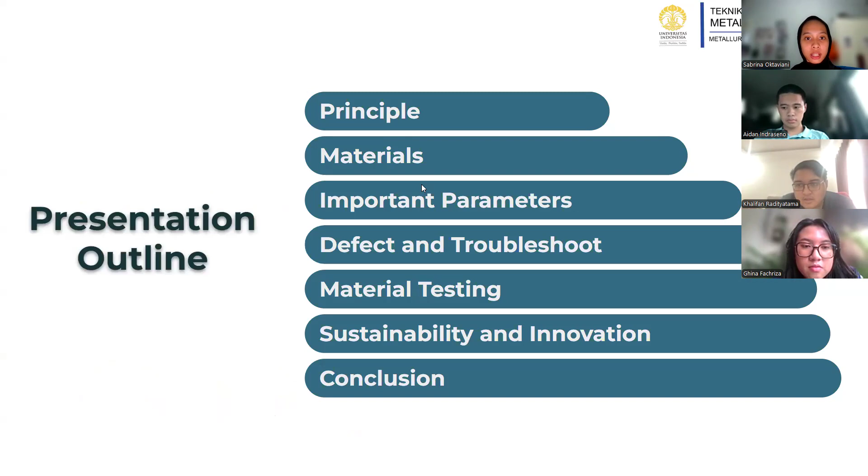Here's our presentation outline, starting from the principle and ending with the conclusion.

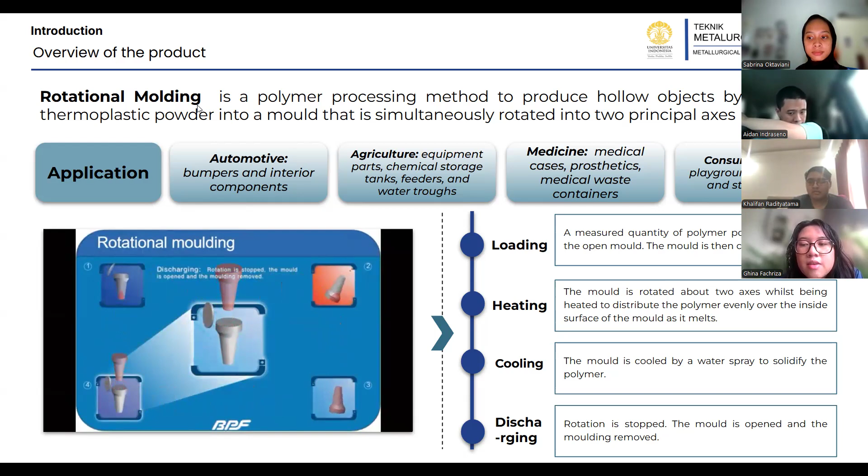Here I'm going to explain the rotational molding principle itself. Rotational molding, commonly referred to as rotomolding, is a polymer processing method designed to manufacture hollow plastic objects. The process begins by placing a measured quantity of thermoplastic polymer powder into a mold. The mold is then sealed tightly to prevent spillage or contamination during subsequent stages.

Here are the key stages of the rotational molding process. The first stage is the loading phase, where the polymer powder is loaded into the mold. The amount of material is carefully measured based on the desired thickness and size of the final product. Once loaded, the mold is securely closed.

In the heating phase, the mold is rotated simultaneously along two principal axes while being subjected to heat. This dual axis rotation ensures even distribution of the molten polymer along the mold's inner surfaces. As the temperature increases, the polymer powder melts and adheres to the mold, forming a uniform layer.

After sufficient heating, the mold enters a cooling stage, during which water or air is used to reduce the temperature. This cooling process solidifies the polymer, ensuring the object maintains its shape and structural integrity once removed from the mold.

The last phase is the discharging phase, where once the polymer has fully solidified, the rotation stops, the mold is opened, and the whole product is carefully removed. The final product typically requires minimal finishing, as the process inherently produces smooth and uniform surfaces.

Rotational molding is a highly versatile manufacturing process with applications across various industries. In the automotive sector, it is commonly used to produce durable components such as bumpers and interior parts.

In agriculture, it is employed to manufacture essential items like chemical storage tanks, feeders, and water troughs, which require robust and weather-resistant properties. The medical field also benefits from rotational molding for creating prosthetics, medical equipment cases, and waste containers, ensuring hygiene and functionality.

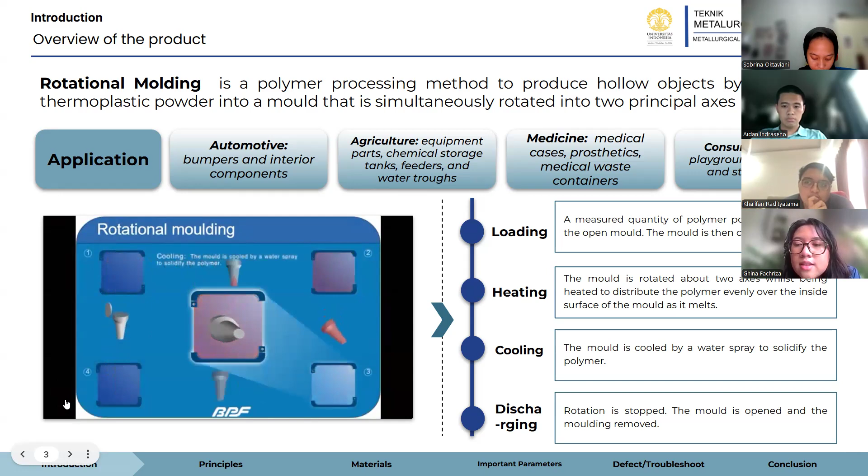Additionally, in the realm of consumer goods, the process is used to produce items such as playground equipment and storage bins, offering lightweight yet sturdy solutions for everyday use. This adaptability makes rotational molding a vital method for crafting diverse, high-quality products.

This process is particularly advantageous for creating complex shapes, uniform wall thickness, and durable products at a relatively low production cost, making it ideal for both small and large-scale manufacturing.

Now we're going to the material selection for rotational molding. First, we have the common polymers used. Polyethylene is the most commonly used polymer for rotational molding. Its thermoplastic properties make it easy to heat and reshape using this process. Applications include cargo tanks and toys.

Another common polymer is polypropylene, which has a higher heat distortion temperature and excellent chemical properties. Resistant to abrasion, it is very suitable for food packaging applications.

We also have nylon, which is known for its high impact strength and high tensile strength. Its physical properties are maintained at high temperatures, and it is also resistant to many chemicals. Applications for nylon include fuel cells and air ducts.

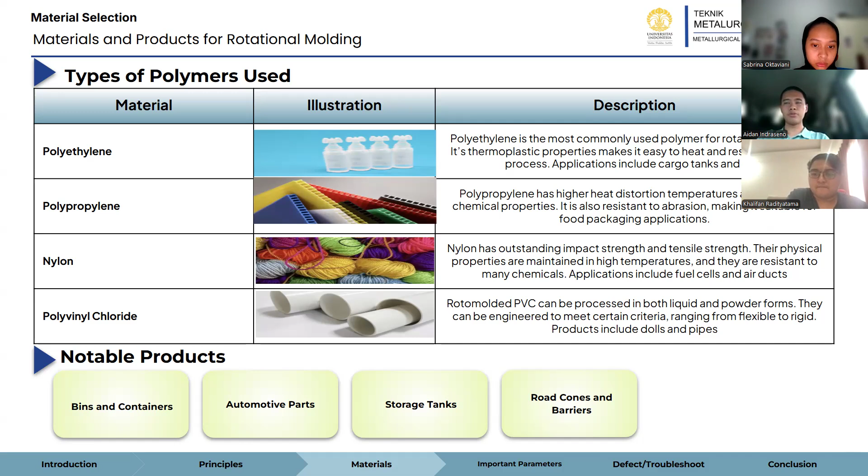We have some notable products which will be explained in detail in the next slides.

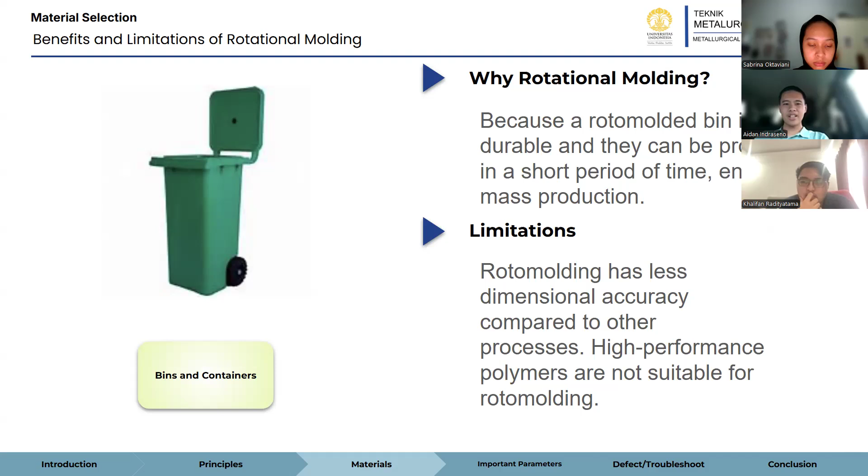First, we have bins and containers. Why can they be made with rotational molding? Because the result is a durable structure, and they can also be produced in relatively short periods of time, which allows the chance for mass production.

The limitation, however, is with dimensional accuracy, as rotational molding has lesser dimensional accuracy compared to other processes, and some types of polymers, especially the high performance ones, are not really suitable for rotational molding.

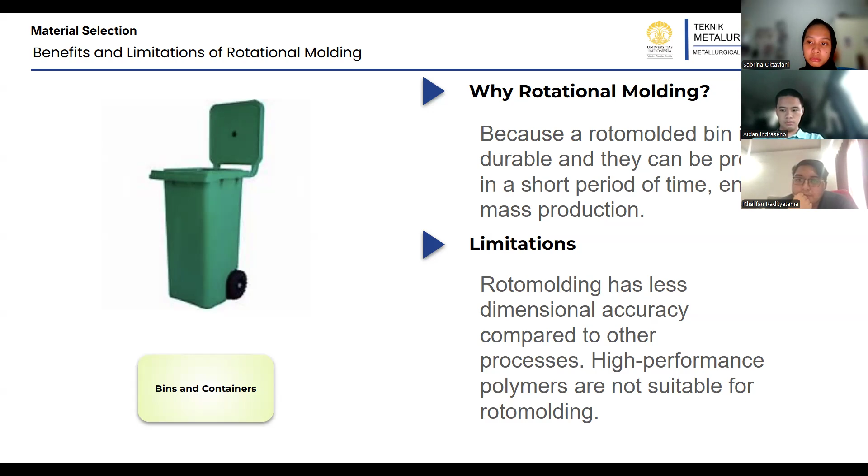Another product is our automotive parts for cars or other transport. Why is rotational molding suitable? Because it's ideal for lightweight structures, and we also need products that are resistant to corrosion and other chemical agents, and they also have consistent strength and durability due to the uniform wall thickness.

Except in some cases, the thickness in complex geometries are harder to control. Also, sometimes the production itself may take long because the part has to undergo many stages such as heating, cooling, and demolding. Next.

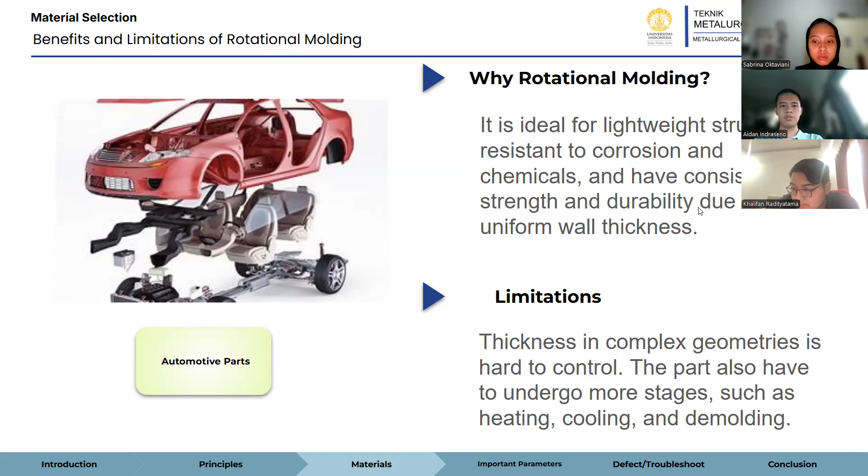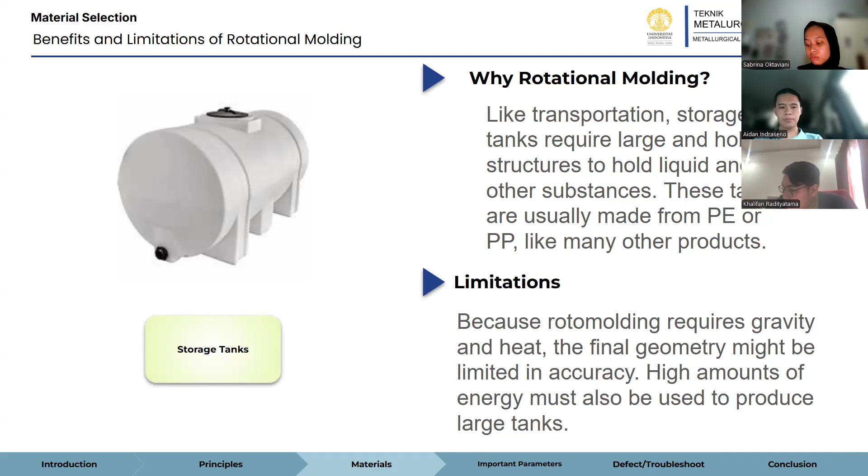Another product is rotational molding. Like in transports, they require large and hollow structures to hold liquid or other substances. These tanks are usually made from PE or polypropylene, like many other products produced using rotational molding. But because rotational molding requires gravity and heat, the final geometry might be limited in accuracy. Also, high amounts of energy must be used to produce large tanks. Next.

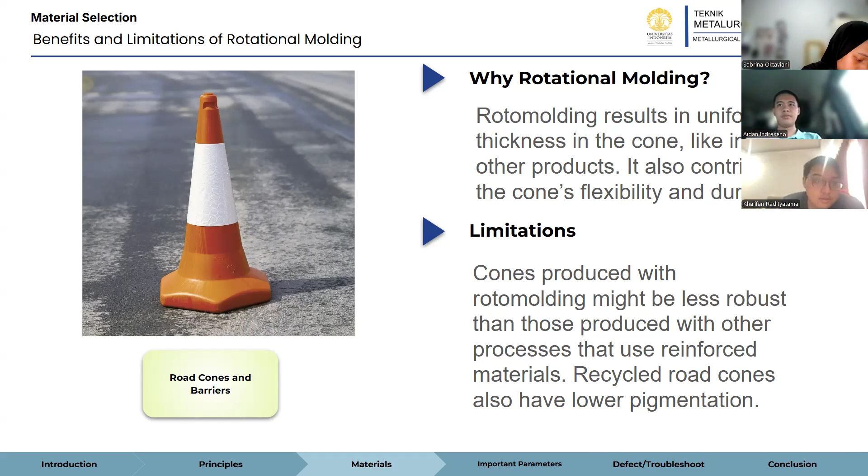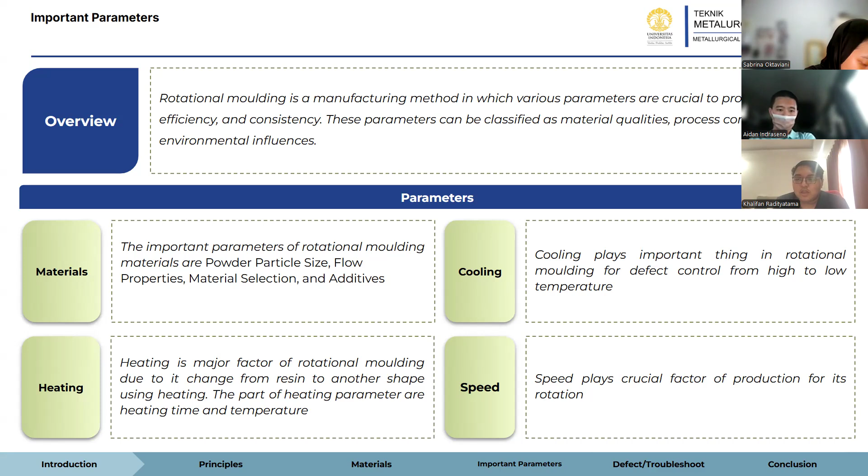The last parameter is rotational speed and movement. The rotational speed is critical to distribute the polymer along the mold surface, and the rotational ratio is the ratio between axes that affects the polymer flow inside the mold. Next.

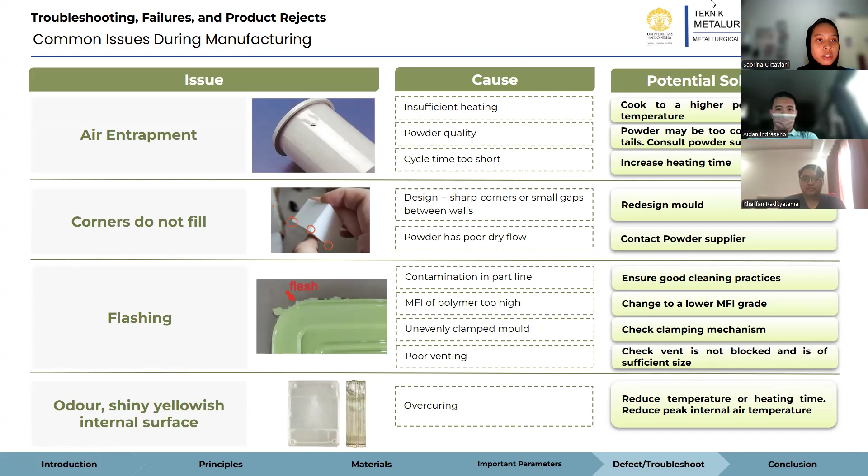The next topic is troubleshooting failures and product rejects, and this covers the common issues during manufacturing. The first issue is air entrapment. The cause of this is insufficient heating, powder quality, and cycle time being too short. Potential solutions: for insufficient heating, cook to a higher peak internal air temperature, and for powder quality, the powder may be too coarse or contain fines, so consult the powder supplier.

For cycle time too short, we can increase the heating time. The second issue is corner do not fill. The cause is designed sharp corners or small gaps between walls, and the potential solution is to redesign the mold.

And the powder has poor dry flow. The potential solution is to contact the powder supplier.

The third issue is flashing. The cause is contamination in the part line. The solution is to ensure good cleaning practice. And for MFI of polymer too high, the solution is to change to a lower MFI grade.

The next is an unevenly clamped mold. The potential solution is to check the clamping mechanism.

The next is poor venting. We have to check the vent is not blocked and it's sufficient size.

The next is odor and a shiny yellowish internal surface. The cause is overcuring, and the solution is to reduce the temperature or heating time, reducing the peak internal air temperature.

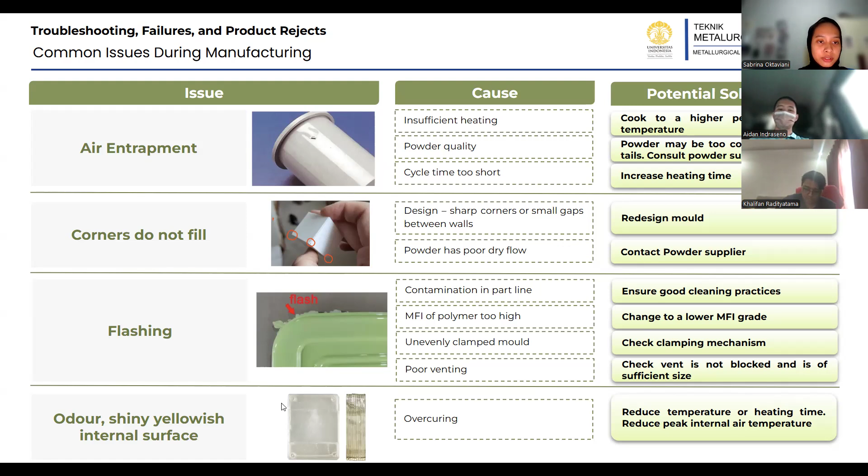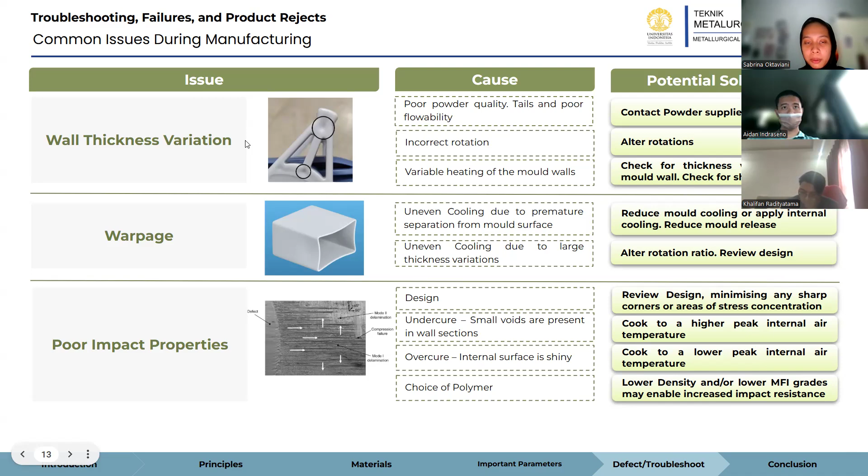This is the industry standards and testing methods. For tensile tests, we can use ASTM D4745.

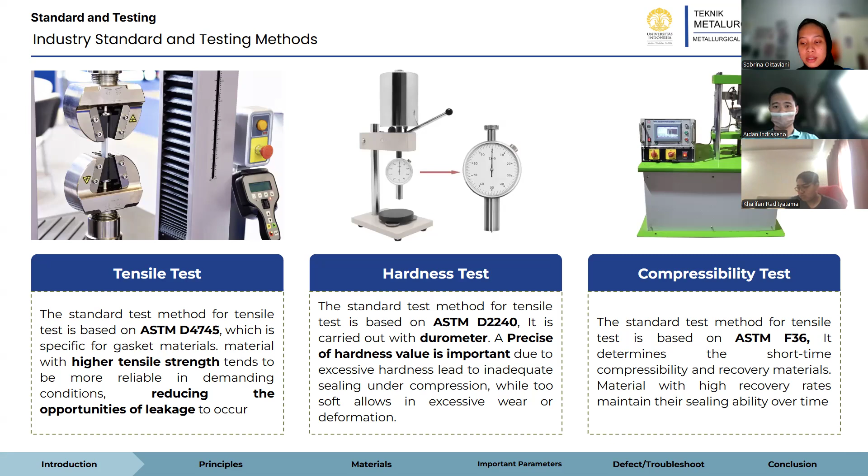And the compressibility test is with ASTM F36. The next one is environmental and sustainability.

For materials performance, polyethylene blend with 10 wt% rHDPE improves the tensile strength and Young's modulus, but reduces impact strength. Recycled PE from water tanks with plasticising additives achieves mechanical performance comparable to virgin PE.

For incorporating renewable and bio-based additives, we can use these types of materials that can significantly lower the reliance on petroleum-based materials, and alternatives not only reduce fuel consumption but also help decrease greenhouse gas emissions throughout the product life cycle.

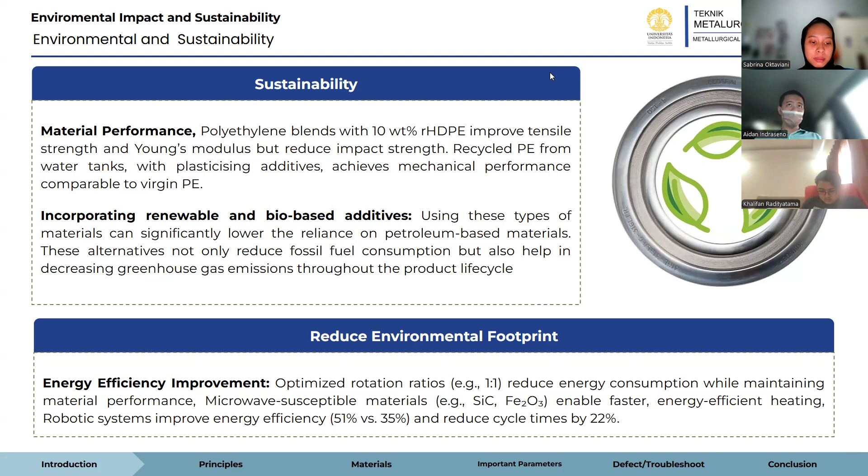For energy and efficiency improvement, we can optimize the rotation ratio to reduce energy consumption while maintaining material performance. Microwave susceptible materials such as SiC and Fe2O3 enable faster, energy-efficient heating. Robotic systems improve energy efficiency and reduce cycle times by 22%.

In conclusion, rotational molding offers flexibility in creating complex hollow parts with uniform thickness. Modeling and simulation tools enhance process predictability, optimizing heating, cooling, and material behavior. Advanced materials and reuse, such as recycled polyethylene and blend polymers, align rotational molding with sustainable manufacturing goals.

Rotational molding involves a heated mold which is filled with a charge or shot weight of material, and it is then slowly rotated, usually around two perpendicular axes, causing the softened material to disperse and stick to the walls of the mold, forming a hollow part. In order to form even thickness throughout the part, the mold rotates at all times during the heating phase and then continues to rotate during the cooling phase to avoid sagging or deformation.